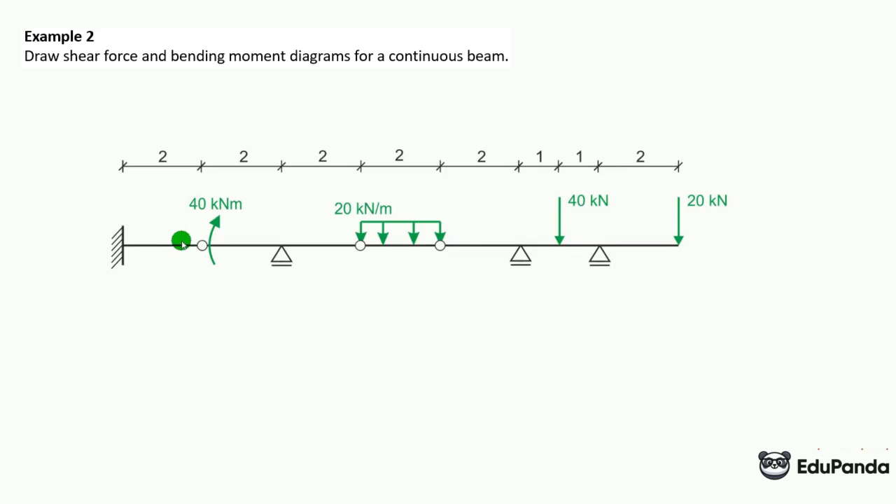So now we will quickly move on to the second beam. Now, the second method, we have such a beam, there are also 3 joints, so that isn't easier. We'll do the same, which is to solve it, calculate the reactions, and draw the internal force diagrams, but without breaking it into simple beams.

So the principle is this: we have 3 balance equations at our disposal, the sum of projections on the axis and the sum of moments at any point. And from each joint, we have 1 additional equilibrium equation. If it were a frame, it would depend on how the joint connection looked, as one joint might yield more equations if it connected more than 2 rods.

For beams, 1 joint equals 1 additional equation. This equation is the sum of moments in the joint from the right or left side, meaning if we were doing the sum of moments at this joint from the right side, we would cut off what is on the left. We do not see what is on the left side, and sum up all those forces on the right side, summing their moments about point E.

So we have 3 equilibrium equations, plus 3 more from each joint, so 6 equilibrium equations total. So we have the sum of moments at any point, the sum of moments in each of these 3 joints from any side we want, but assuming one joint gives 1 equation. And we also have the sum of projections on the x-axis and the sum of projections on the y-axis.

From the sum of projections on the x-axis, I already entered the reaction HA as 0. Now let's consider how to sum moments precisely at this point E, meaning in joint E from the right side, we will have unknowns VF and VH. So 2 unknowns, because here it is not possible to immediately create an effective equation to calculate any reaction immediately.

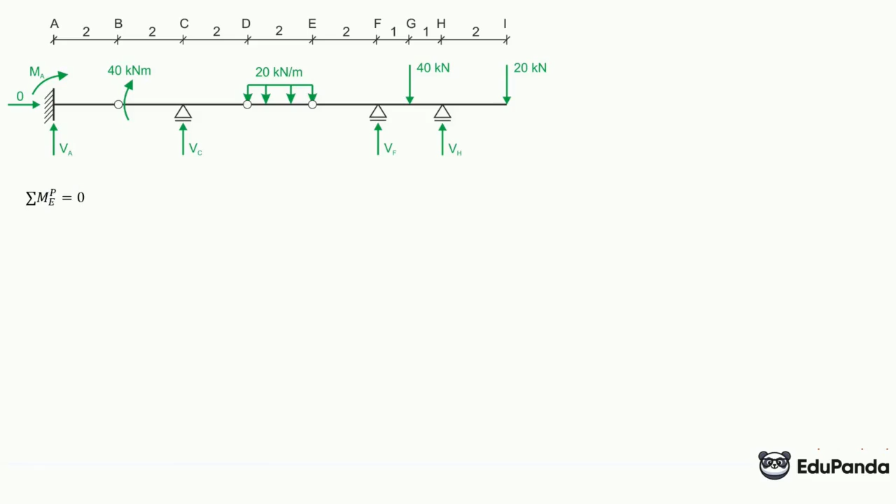As I said, the sum of moments at point E from the right side. We could do it from the left side, but as I presented, it will be easier to calculate from the right. And then we'll sum up the moments at point D from the right side. The system of these 2 equations will allow us to calculate the reactions VF and VH.

And that's the sum of moments at point E: minus VF times 2 plus 40 times 3 minus VH times 4 plus 20 times 6, equals 0 at point D from the right side. Here I'll handle the resulting force, which is 20 times 2, so the resulting force is 40. So we have 40 times 1 minus VF times 4 plus 40 times 5 minus VH times 6 plus 20 times 8 equals 0.

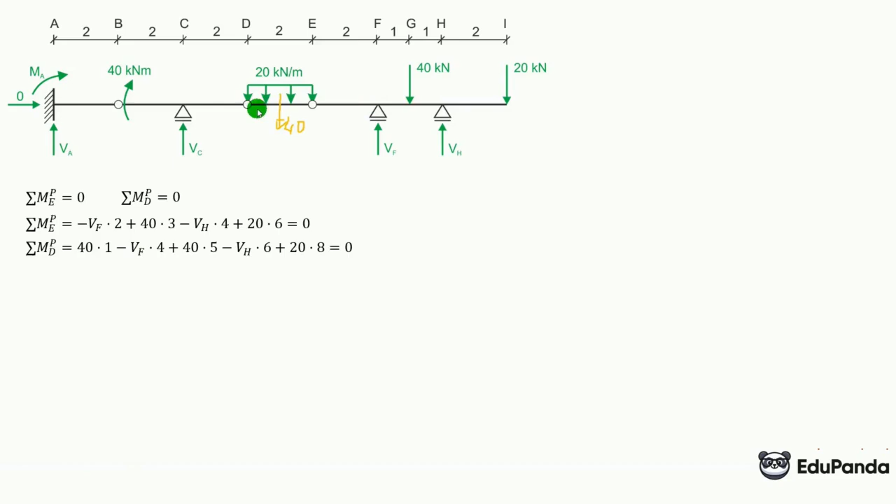If we simplify here, VF and VH from the left side, the rest on the right, and here the same. I already entered it into the calculator. This system of equations is simple, so it can be solved by hand, no problem.

And from this system of equations, we calculate the reaction VH, which is 40 kN, and VF 40 and VH 40.

Now the sum of moments at joint B, also from the right side, equals 0. And it looks like this: 40, which is here. This moment, minus VC times 2, plus 40 times 5, minus 40 times 8, plus 40 times 9, minus 40 times 10, plus 20 times 12 equals 0.

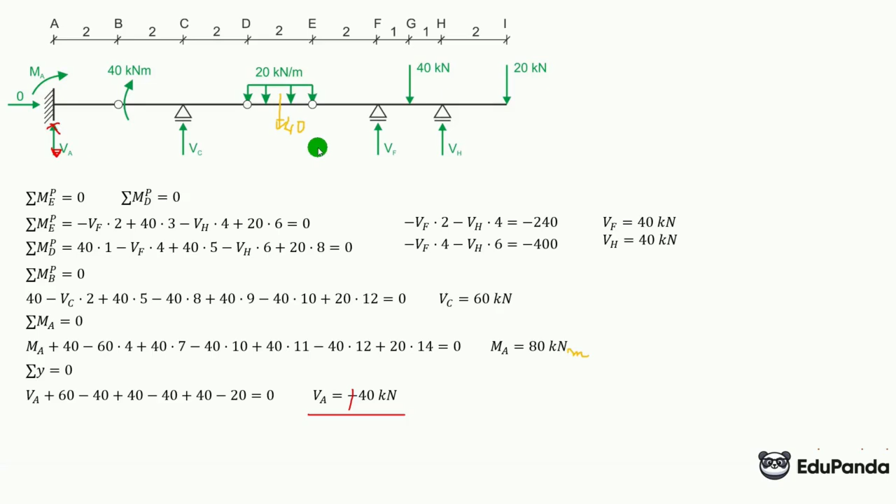Well, okay, we have calculated the reactions. I did a check here as well. Let's do the check: I did the sum of moments at point D, so no reaction passes through this point. It's also a long check because there are quite a lot of forces here.

So we have that moment 80, minus that 40 at 6 meters, plus that 40 moment, plus VC, which is plus 60 times 2, plus 40 times 1, minus 40 times 4, plus 40 times 5, minus 40 times 6, and the last one, plus 20 times 8, equals 0. And you can check it actually equals 0. The left equals the right, so it's okay.

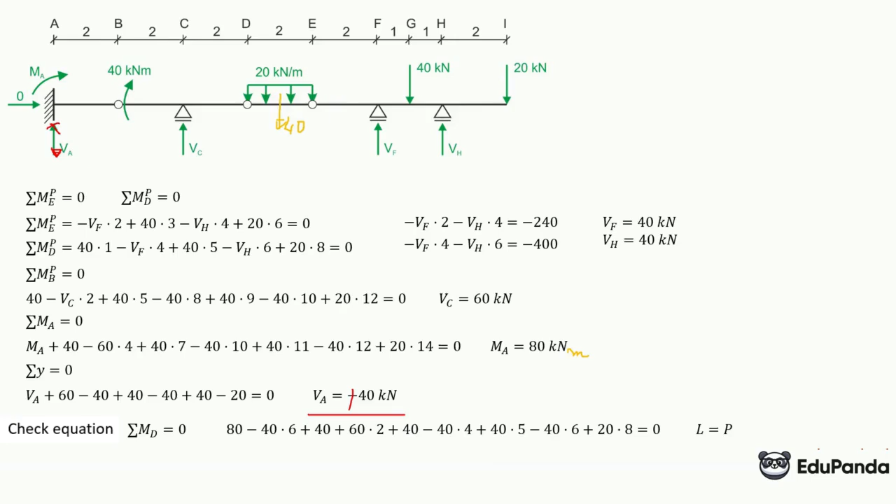So let's draw the graph. I have already entered the reactions instead of VC, VF, and VH that I calculated. And we draw. I will not dwell too much on this. 40 down, then we don't have any shear force.

Then here too, there is no shear force. There is a moment, but the moment does not affect the shear force graph. So it's still minus 40, then 60 up, so to positive 20. Then there is no shear force, so the 20 doesn't change.

Next, we have a continuous load. The resultant of this load is 20 times 2, which is 40. So from our positive 20, we move 40 towards minus, which is down, as indicated by the direction of this resultant. So we also see that this graph should pass precisely through the center, from 20 to minus 20.

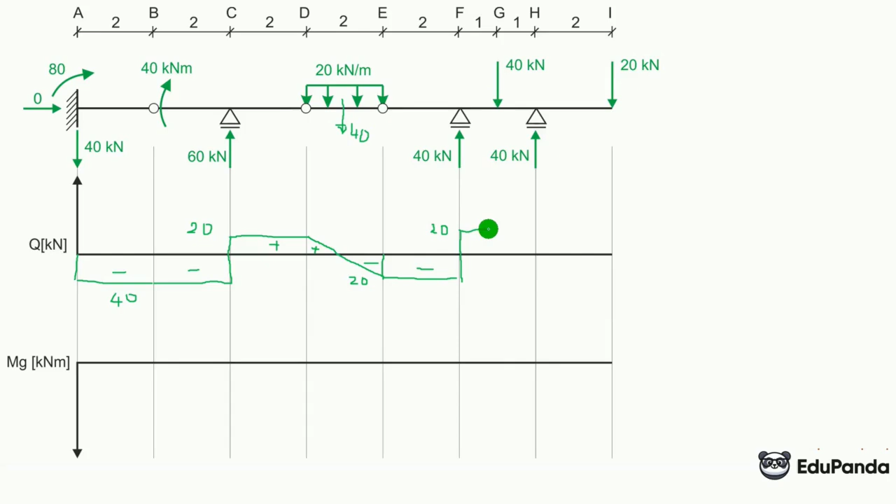Cut plus minus, then in this section there is no shear force. Then we have a jump of 40, which means up to plus 20. Then we have here... oh no, I didn't draw the guidelines, you see. Then we move to the next shear force. Here we have a drop of 40 down, which means to minus 20. Then the value does not change, 40 upward.

Now it's 20 here on top, and to the end of the beam, 20 down, which lowers our shear force's graph to 0. Plus, minus, plus, and 20.

All right, I'm counting the areas. So here we have 40 times 2, which is 80. Now this one, 40 times 2, 80. 20 times 2, 40.

1/2 times 1 times 20, which is 10. Because here is 1 meter, right? This length is 1 meter, because this graph passes through the middle.

20 times 2, 40. 20 times 1, 20. Here it's the same. And here 20 times 2, 40.

We are drawing the graph. Is there any external moment on the right side of the beam? No. We have to descend to 0 at the end here. Where else should there be zeros? At the joints. Very important information, very helpful. We can immediately tell we're miscalculating if we don't come down to 0. Here there should be 0 and here should be 0.

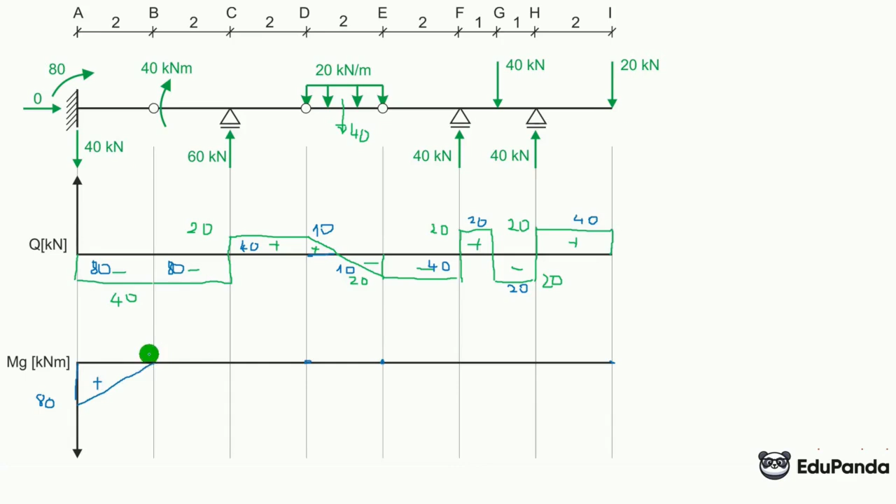80 towards the negative. The value was constant on Q, so on M linear. And the positive value was here. So at the joint, we are at 0, which is nice.

Next, we have a jump of 40, because there is this moment, and it is like in a joint but on the right side. As I mentioned at the beginning, the moment must be marked, either on the right or on the left. While shear force can be typically on the joint, the moment must already be defined either on the right or on the left side.

So now we have a positive 40, a jump of positive 40. Here we have pluses at the bottom. So in this joint, it zeroed out, but we immediately have a jump.

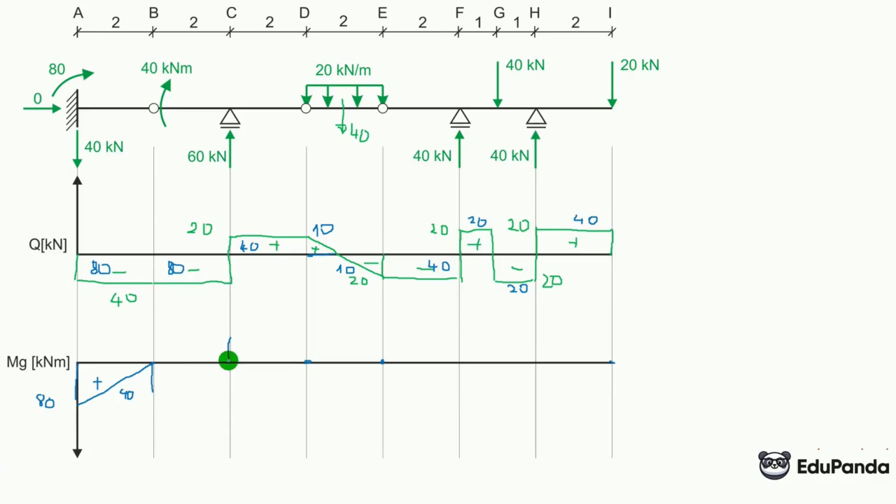That can also happen. So we are at positive 40, now 80 linearly towards the negative. So we move the graph to the other side to the same value, but negative, 40. Then, so we are at a negative value.

Then we have towards plus, because that is the sign of this graph by 40. There was a constant value, so we go linearly here. Well, to the joint to 0, it's okay.

Now here we have a linear graph, so we will have a parabola. So first, 10 towards the positive, then again towards the positive, and then 10 towards the negative. So it will be a parabola with a maximum value of 10. 10 plus, you understand. We were here at 0, now the area is 10, right?

And it is positive. The shear forces graph here is positive. So first to the value of 10, a change of 10, but here I had it linear, so I draw a parabola, 1 degree higher in the equation, and then I'm at 10.

So here we calculate the maximum moment. And now from this positive 10, the value of the area of this triangle, 10. It is negative, well, to 0. From the positive value of 10, a change of 10 by minus 10 to 0, okay.

Now linearly 40 negative, so upwards. Then here should be the auxiliary line, 20. We are at 40. Now 20 towards the positive. Linearly, let it be 20 and linear. This is 20, then 20 towards the negative.